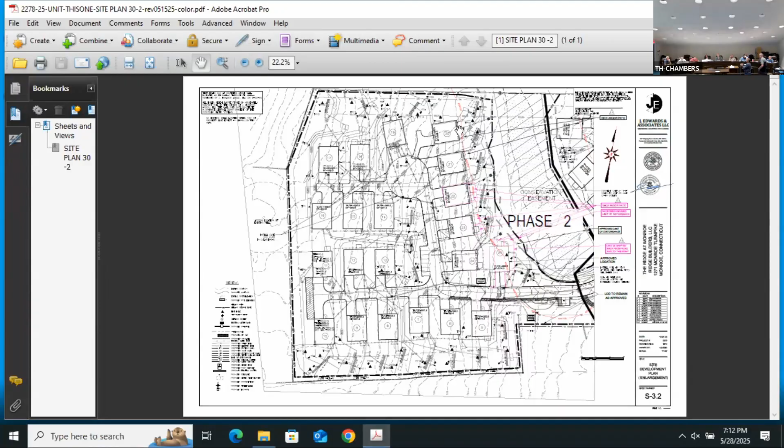So those are the only foundations remaining that are within an upland review area. What we've done all along is, every house that's constructed, when the as-built survey is done, we keep the existing proposed footprint and then show the actual footprint. Other than unit 19 or 20 rather, there really hasn't been much variation in the shape or direction. But the only foundations we're now looking at are units 12, 13, 14, 15, and then 21 through 25. Those are the only ones remaining.

On the application and on the plan, it says the limit of disturbance is within the approved limits, but is that the case? I see the limit of disturbance is shifted on that plan. I think that was a drafting error from something old that we didn't change. So the limit of disturbance is still the limit of disturbance, and that's not moving - my house hasn't changed at all.

Do you see the corner of 25? It does look like it's shifting - do you see where I'm talking about? Yeah, I do, I noticed that too, I'll have to check that out. If it is modified, it's very similar, but the clearing limits, I don't think you'd have to worry - we staked all that limited disturbance, so whatever he cleared was where that limited disturbance was.

If you could just clarify that, because if the limit of disturbance did shift, I just wanted to note that on the application. Yeah, I think we'll pull it back. Right now we're showing where that house is, showing a deck and a patio, but it's more likely it's just going to be a deck. Again, we can pull that back so we go back to the original limit of disturbance, since as it's shown there's a modification to it. So we'll go back to the original.

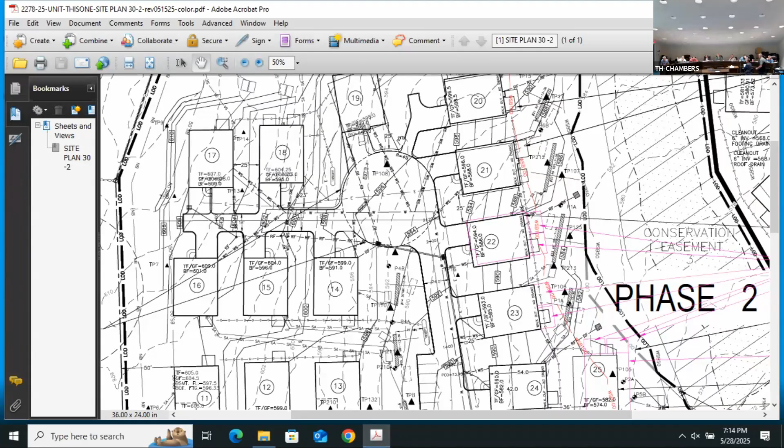I have a question with regard to the upland review area - I think you're calling it the WSB. So please point out to the audience where the line seems to go through some of the decks, it goes kind of right along the back of the buildings here.

WSB 100, and then it goes through 25. Did you consider deleting home 25 instead? No, that's not an option - it's been approved. All I'm trying to do is go back to the original limit of disturbance.

On the other side of the development in phase 1, I believe there are spots where we're 35, 40 feet from the actual wetlands. Just to clarify, Rick, that is what we approved, like where that 100-foot line goes through the building. I see what you're saying, but that wasn't changed.

Yeah, my issue was it came in as 19 homes. These homes were there pretty much, but the homes on the other side, not near wetlands, were not put in. They came back to us a couple years later and asked for 6 more homes to be added. It's 19, now it's 25. Was initially 27 - the first approval was 27.

The wetland approval was initially at 27. Then the new developer came in, who came back with 19, because that's all he wanted. He modified the approval to go down, and then we went back up again. So it was back and forth. But that limit of disturbance has been basically the same - the building's been in that general spot.

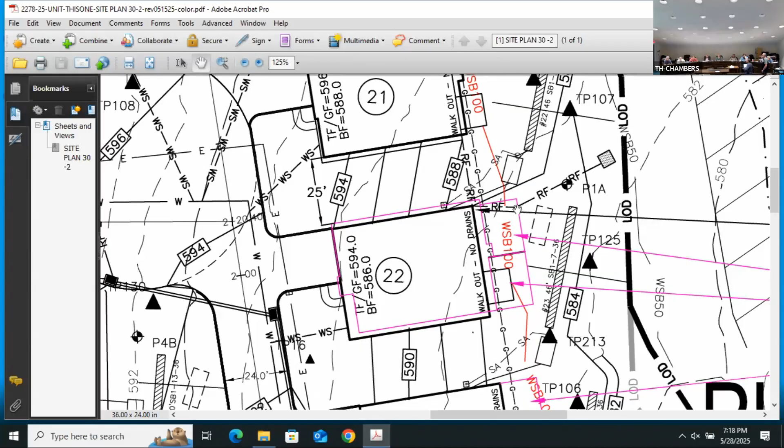So for 25, there's about 25% more of the house now in the upland review area. 25% is a pretty big percentage, so I don't want to dismiss that. I'm not saying I have an issue with it at this point, but there is probably another 25% of the house now within the upland review area, so I just wanted to recognize that.

The question I had - I just want to make sure I understand what was said. So in the LOD, is the black line or the gray line accurate? I think we're going to go back to the gray line, because I was on vacation and I think that got changed without me knowing.

Okay, so that should not have happened. It should be pulled back. We're going to pull that even, 25. West, you're going to pull it back a little bit. And we can eliminate one or the other, so there'll be one or the other on that unit. That seems like a much better solution, solves both issues.

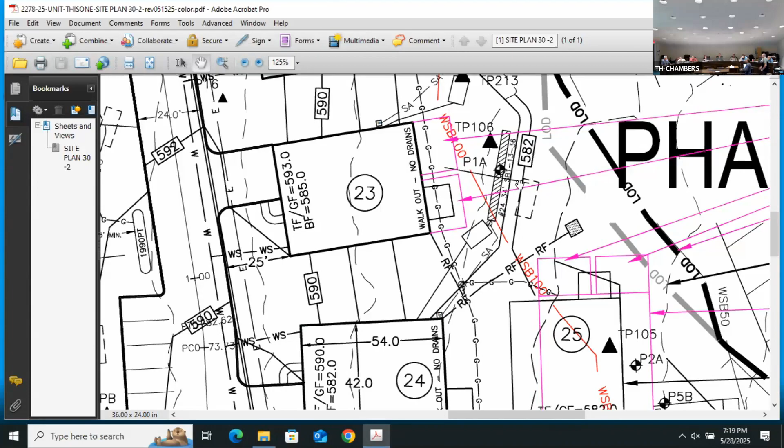I think you mentioned this before, so I apologize for asking, but why was 25 pushed over? Originally where 24 and 25 are, the back of 24 is pretty close to the left side of 25. I'm just trying to give a little more separation to make that house more desirable. You mentioned 24 was going to be 6 feet shorter, so right now we're 25 feet between them. If I could make it 35 feet, it would be more comfortable.

All right, so to summarize, we're going to take 25, shift it back a little bit, take the LOD line, move it back to where it was, and eliminate either the rightmost patio deck option, keeping it just on the left. I think that summarizes what's planned there.

Okay, all right, so we'll see that. What else did we want? Was that shifting 25 back to its original position or no? I think you're just going to split the difference. It's going to have to come back a little bit to stay away from the limit of disturbance. So it's going to go west, closer to where it started, but not quite.

And also with the one block in the back, I think that takes that corner off. And again, it's unlikely even on 22 and 23 that I'm going to end up with both a deck and a patio. Currently, 21 is the only one in the entire development that has even asked for both.

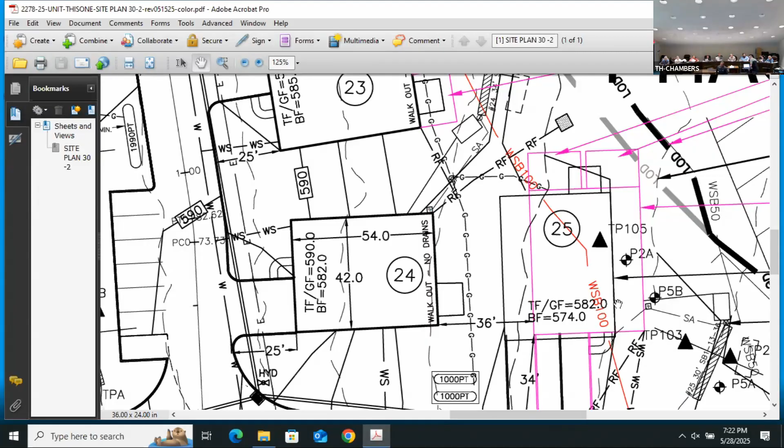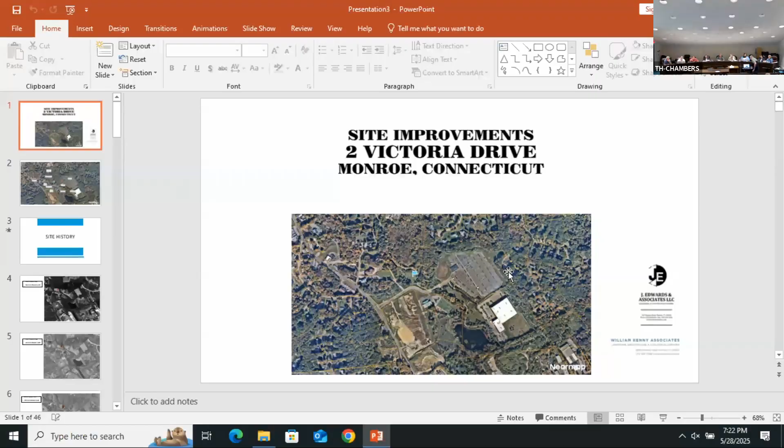Now we're moving on to public hearings. IWC 2025-03, file number 1526, 2 Victoria Drive, proposed construction of a 10,000 square foot daycare and associated site improvements. Central LLC applicant, J. Edwards and Associates LLC representative. This is continued from 5/14/25.

Jason Edwards, and Associates Engineering Surveyors, here on behalf of the applicant. Last time we were here, we had just a few outstanding questions. The town engineer had 2 outstanding questions that we've answered: the detail regarding the playground material during flooding, we provided a detail and had back and forth with James, and I believe he's good with that based on the conversation my office had with him. The other was the question on the calculations used for the flood elevation. Bill Kenny had provided a report that you had requested, I think that got to you guys, and he also modified his plan to remove the reference to the herbicides. So beyond that, there really hasn't been any changes. We're here to answer questions and find any more information you need.

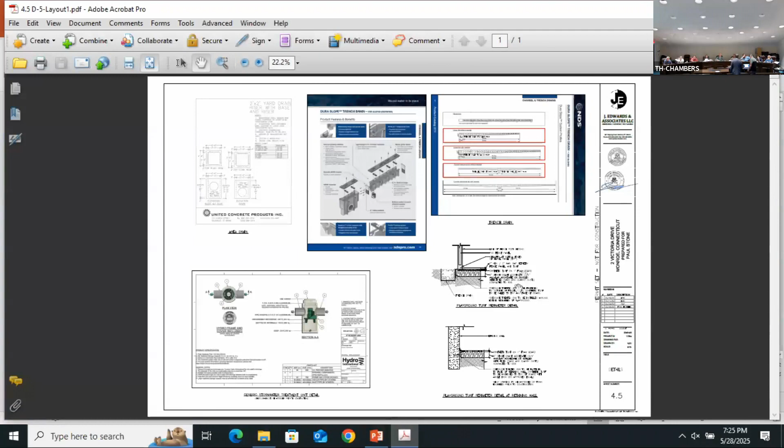I know one of the big concerns was the playground surface and how it's going to be secured. Perhaps you can walk through that detail. I did speak to the town engineer, James, on that. He saw the newest submission. There's a 2x8 that's getting anchored around the entire perimeter of the playscape, and he was satisfied with that. But yeah, if you want, I'll walk the commission through that detail.

We've got a pressure treated board that's going to be stuck in the bottom on the edge. That acts as a frame essentially. It'll be nailed to the top of the face of the board, so it'll wrap and then nailed to it, and that then gets sunk down below.

And then you've got the turf that's placed. You got 5 inches of dense grade aggregate going underneath it, and then you've got a 1 inch by 2 inch gap between the fence panel and the turf.

Based on conversations we had with them, this is standard, this is a typical detail you'd expect to see for synthetic turf fields and things like that, that kind of need to be a little tight. And my understanding is that the life cycle of the actual turf and the life cycle of the pressure treated board should be very similar.

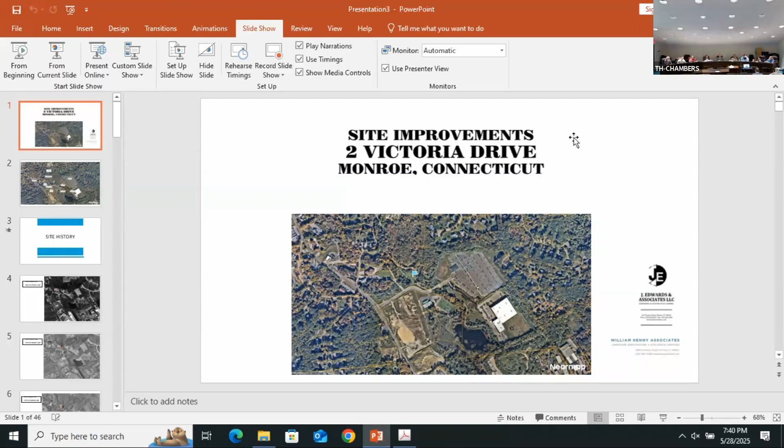It would be dealt with when we got to the planning and zoning. It wouldn't even be a condition because it's not anything that - he tries to do a review of planning and zoning and wetlands at the same time in case a planning and zoning comment would change something in the upland review area. He tries to do it holistically. So I believe his outstanding comments are more planning and zoning comments, which we'll address once we get to that stage of the application process.

One more question - in exhibit number 15, in the management methods, management sequence below it, number 2A in the management sequence: monitor, prepare, and submit written reports to the Monroe Inland Wetlands Commission. Would those just be submitted to staff and then relayed to us? It would go to staff and staff would review. Actually, it says reports go to the Monroe Inland Wetland Commission, so I read that to mean they would be submitted to this commission as a whole, not just staff.

So it wouldn't just be relayed, it would be provided to staff, and then staff would provide it to us as an agenda item. That's how it's written, so I think that's how it should be executed.

I do have one other question - just a clarification on the gas station. So the gas station is just to show us the proposed possible detention area, the feasibility plan, so it demonstrates that something could be built there. Yeah, and that was what was in the initial plans, some of the more recent ones - that was shown as the gas station, so we carried that through. Right, just wondering why we got this.

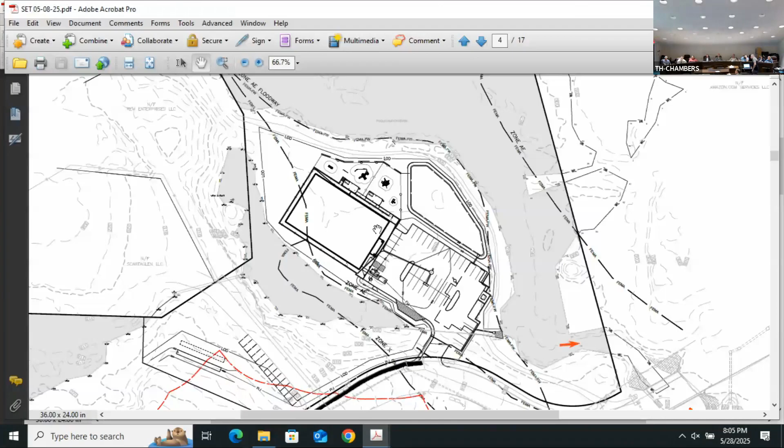Whether it's a wetland or not, I think what's most important is that it's going to be vegetated in a natural way and it's going to collect water and allow it to either evaporate or be taken up by the plants. It's going to be filtered by the plants. And it's an excellent buffer between the development and certainly the most important wetland and watercourse resource at the property, which is the river. So it's a great buffer in that way.

It's hard to predict exactly how wet it's going to be, but I'm confident that it will be wet. It is going to vary, it's going to be a gradation of different levels of wetness.

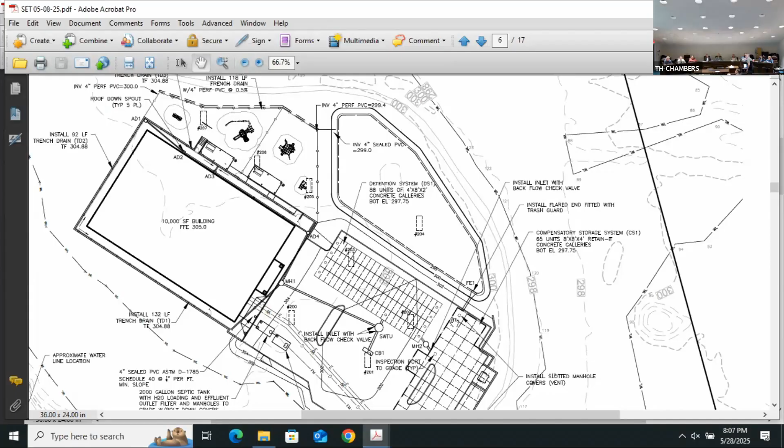Just to weigh in a little bit here, Jason Edwards for the record. The way this is designed, the bottom of this pond and the bottom of this large detention system, or the compensatory storage system, is all level. It has an outlet that will retain the first inch plus of rain. So every time it rains, a small amount of rain, the water is going to sit in that basin and in the underground system. It's not going to outlet until it gets to a certain event, and then it will start to outlet, but it still retains that water quality volume.

My concern is that water is going to have some washing of the cars, oil and gas. That's separated — the two systems are separated, so it should not have any pollutants in it.

What material will be used in that basin to construct it, and then I assume you put some soil and some plantings around it? Bill would have that detail, what he's got in there for plantings, but otherwise it would just be your typical existing ground and then whatever you're going to use for common fill. That is detailed in there — yeah, I think Bill's got the details.

Okay, we're still technically in the public participation. Is there anybody else online that wants to chime in? There's no one else online. All right.

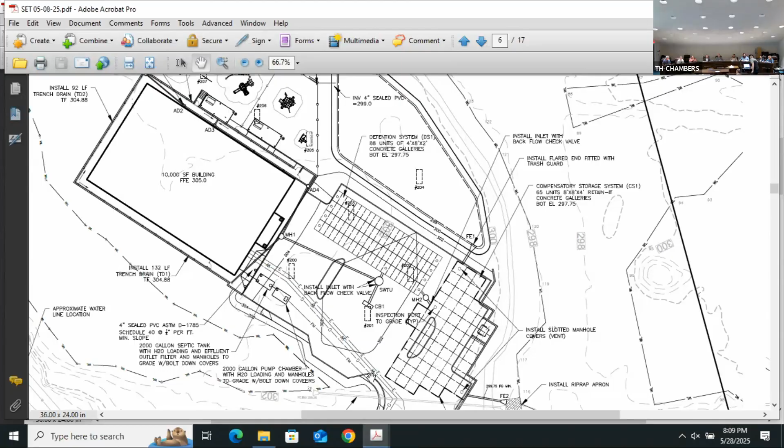Do the commissioners have any other follow-up questions now that we're coming to the end here? Anyone? I will make a motion to close this public hearing and move to deliberations. We have a motion to close, do we have a second? I have a second. All in favor? Aye. Is that unanimous? Did we get a unanimous vote there? Okay.

Moving on to public hearing, IWC 2021-06R-A1, file number 1376, 64 Cambridge / 4 Independence Drive, proposed modification to reduce net fill quantity and modify the method of wetland restoration. Astro Landholding LLC and Spacely Landholdings LLC, applicant; Mary Blackburn LLC, representative. This is continued to June 11th, 2025, so it is not being heard tonight, and it will be continued to the next meeting.